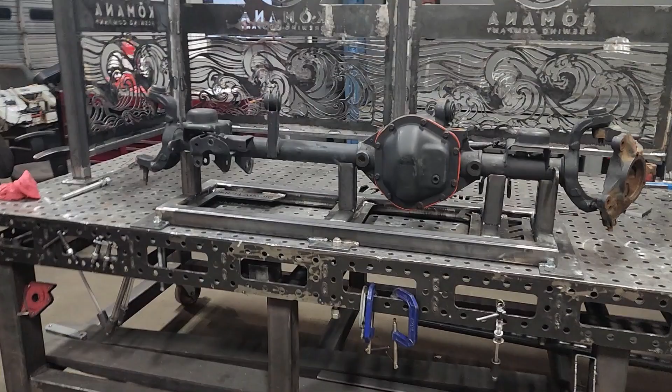And I'm basing the one that we're building today off of his table, but I'm building a smaller version. The reason I'm doing a smaller version is we do a lot with axles. We work with Jeeps, custom fabrication on suspension for vans. We're doing an International Scout now, just about anything that is off-road related.

And this one is great. Obviously you can put an axle on it, but it takes up a lot of space. We need another table, another working surface. So we're gonna base the dimensions off of the very first welding table I ever built. This table here I built 5-6 years ago. It was actually my very first welding project, so don't judge the welds on it, but it's very functional.

It does exactly what it needs to do. It actually is adjustable height, which I think I've adjusted a total of 4 times, but it was a cool thought when I built it. But the idea was I'd put a jack stand on one side, a jack stand on the other, drop an axle on, and now I have a surface that's at a good height that I can weld on trusses or Inner-C gussets or whatever we need to.

The table worked. It's very functional. We still use it to this day for anything that doesn't need to be perfectly square. But the problem is, especially with the design without a leg in the center, the table ends up drooping down in the center, and it's just not very reliable for keeping something square. So that's when we built our fixture table, and it is much more reliable than what we have here.

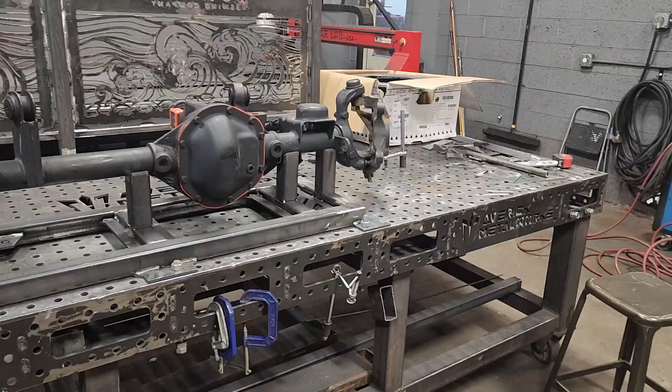So as we are kind of going through things, we decided we needed to build another table to have another work surface. That way this small little axle isn't taking up the entire table and stopping us from being able to build something like these railings, and we're not fighting over the table.

We didn't want to build another one this size just because we are limited in space, but we're going to make a smaller version. Again, we're matching the size of the table before, which is 70 inches wide, 30 inches deep, which will fit an axle perfectly. This axle here is a Dana 44. It's actually a crate axle, a brand new axle, and we're building a jig off of it. That way we have perfect measurements.

The axle that we are going to be correcting is another JK44 Rubicon axle that is bent. The tube itself is bent, as well as the Inner-C. So we'll use the 3 stands over here to set the tube properly. We will check the bend that's in it, and we'll be able to make sure that everything's nice and square.

And then we'll use a digital angle finder like this to check the Inner-C upper and lower on both sides. Make sure we have the correct angles, make sure we have the correct spacing, and then put it back in the vehicle after welding in Inner-C gussets. Another reason that we do it is for trusses like this one. This is a truss that we're building in-house.

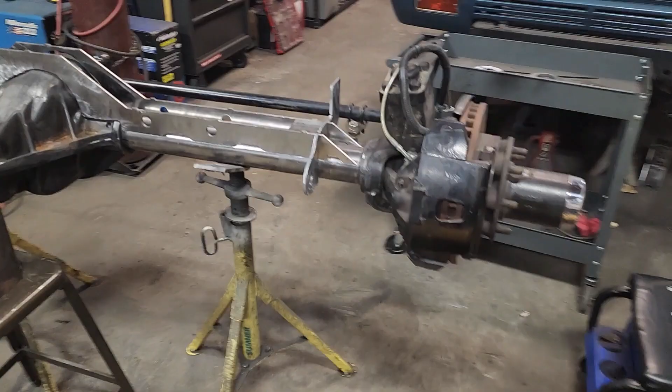It's for Kingpin Dana 60s going in a 4-wheel drive conversion van. And we want to make sure that the axle stays nice and straight when we're welding. So we will clamp it to the table. We'll actually preload it slightly with a chain binder. We'll put it on the table, we'll weld it out, and then once everything cools, it should stay nice and straight.

So enough talking about kind of the projects we're going to use it for. Let's get to drawing. My goal is, let's see if we can draw this in under 60 minutes. I'm going to go ahead and speed it up to 2 times. That way you're looking at 30 minutes worth of video instead of 60. Here goes nothing.

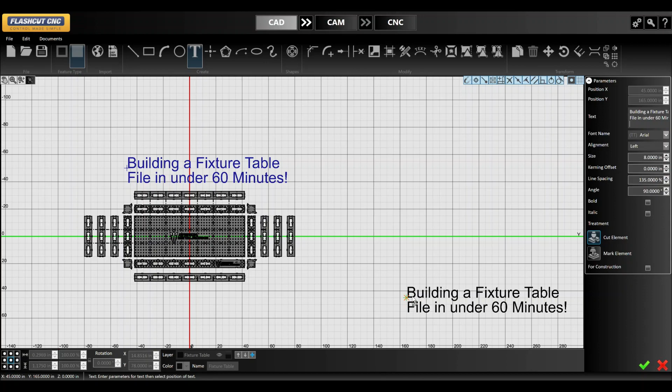Our next step will be to set up all of our lead-ins and our cut path. We use FlashCut for that as well. It is a CAD, CAM, CNC all-in-one program, so we even use that to run our plasma table. When we set the cut path, we want to make sure that we bounce around a lot. There's a lot of holes, which means a lot of heat, so we're going to try and go back and forth and bounce around a lot, making sure that the one area doesn't get too hot and the sheet doesn't end up warping and causing those holes to move slightly. We want to keep our 2 inches on center.

Another thing to note is plasma is not the most accurate process. It is accurate, I'm not saying it's not, but there's a slight taper and there's just irregularities that aren't quite ideal, especially when you're trying to drop a clamp into a perfectly 5/8 hole. If there's that taper, it causes it to rock. So the last time we did this, we oversized our holes ever so slightly. They're 5/8 holes. I think we went to a 0.63 last time. And it works, don't get me wrong. It works just fine. But I think we can do better.

So this time, what we're going to do is we're going to undersize our holes and go through with a mag drill and drill them out. I'm still going to use the plasma cutter to set our sequence and do the majority of the hole. The next thing to note is with plasma, anytime you cut the hole, as it goes around with the torch and it gets the material hot, it ends up causing a hardened surface right around the hole. That is very hard to drill through.